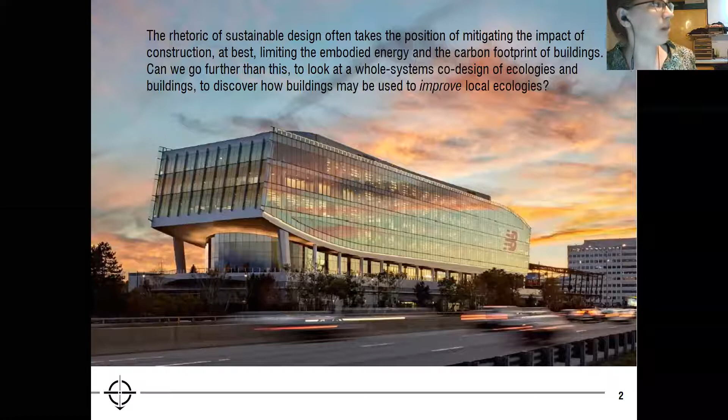Here's another LEED rated building from the Boston area. I found it interesting that the World Green Building Council identifies green buildings as buildings that in design, construction, or operation reduce or eliminate negative impacts, and can create positive impacts on our climate and natural environment. I'd like to propose that we're actually a very far distance from the latter, creating a positive impact for our climate and natural environment.

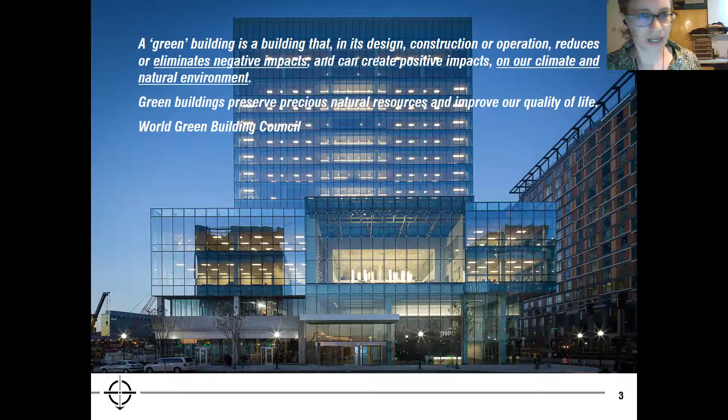But I'm going to show mostly two projects today that are hopefully moving in that direction.

For green materials and green buildings, the building materials I listed before—aluminum, steel, glass, country fired brick, even reinforced concrete—we can see the second column here is embodied energy, and the third column is carbon emissions of the building materials. For all of these LEED buildings, we have extremely high values of embodied energy and carbon emissions.

At the very bottom, we have CSEB, compressed stabilized earth block, with only 5% cement stabilization. That's one of the building materials I'm working with a lot, specialized at the Auroville Earth Institute. So we have a huge, huge difference in how much embodied energy is in these buildings.

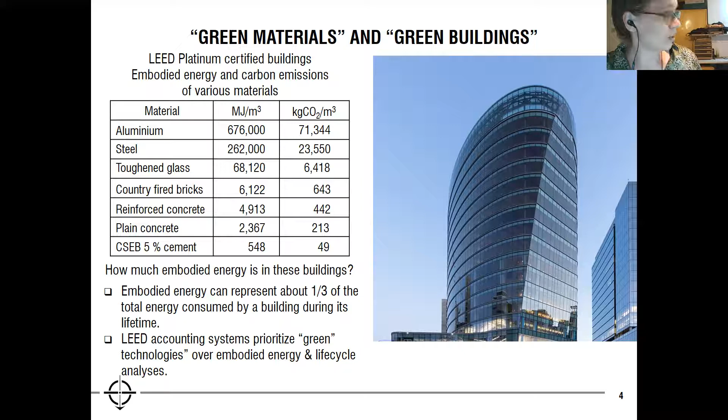LEED accounting systems basically prioritize green technologies, which are often themselves very high emissions and embodied energy technologies, over initial embodied energy and over life cycle analysis of buildings.

But at the Earth Institute, we're dealing with earth—one of the lowest carbon emitting, in fact a zero carbon emitting building material in theory, with very low embodied energy. We can start with the initial values being extremely low.

This is a collection of soils that we have here at the Earth Institute, and I'd like to tell you a little bit about soil before I show you some projects.

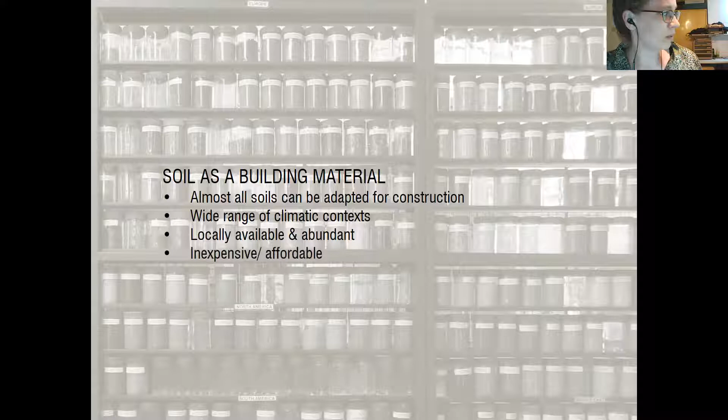Soil as a building material—basically all soils, or almost all soils, can be adapted for construction purposes. We have a very wide range of climatic contexts we can work in. Soil is always locally available and abundant. It's inexpensive, zero energy for production, has a very low carbon footprint, is 100% recyclable with a circular ecology of use, and reduces the use of imported materials.

Also, from the social side, we can say it involves labor-intensive construction methods, which is an important argument for us, that it invests heavily in local economies, local value chains, and human livelihoods, as opposed to just imported materials or technological methods.

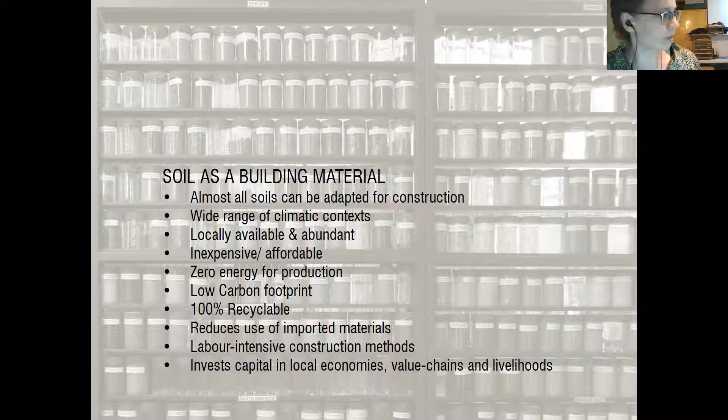This is an image of rammed earth. If we take 1 cubic meter of rammed earth, just to give you an idea of the complexity of the material, it will have more than 600,000 trillion individual grains in that material.

So it's a granular matter, very complex. We call it soft matter because it behaves both as a solid and also flows like a liquid.

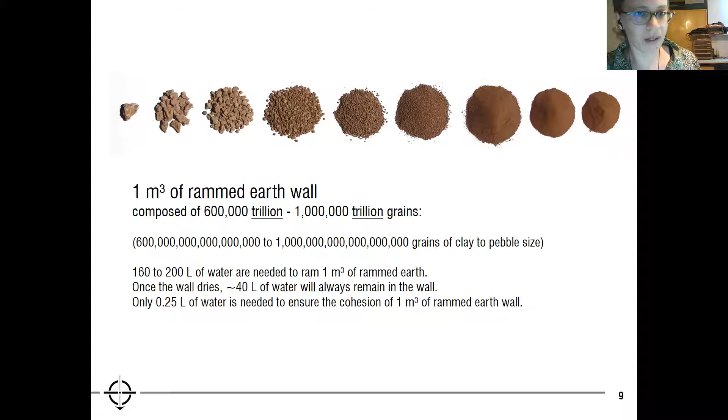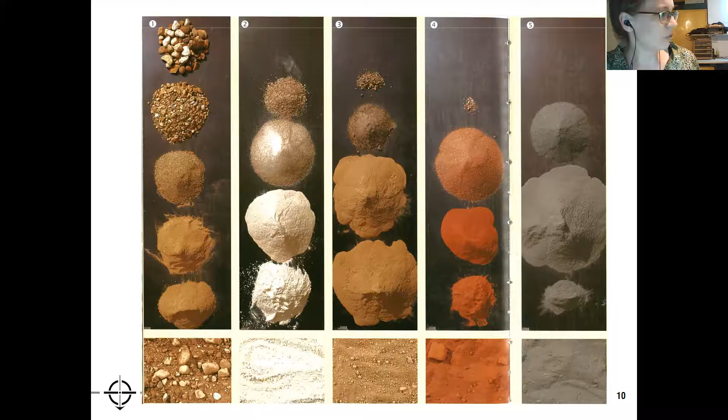Soil varies infinitely in grain size, texture, color, and behavior. We have such a wide range of different clays found in different earth samples, and therefore the behavior of each soil sample is extremely different.

I'm going to skip a little of the technical stuff here, but basically we have electrostatic force in clays. Clays are the living particle of the soil—they're what bind the soil together. Clays allow us to absorb and release water, therefore we can have swelling and shrinkage in clays and in earth, and that gives us breathing buildings.

This means we have to figure out how to stabilize the soil and make it stable in buildings, but it gives us benefit for human comfort because we can use it as a natural way of breathing in the building, and we'll talk about this in detail.

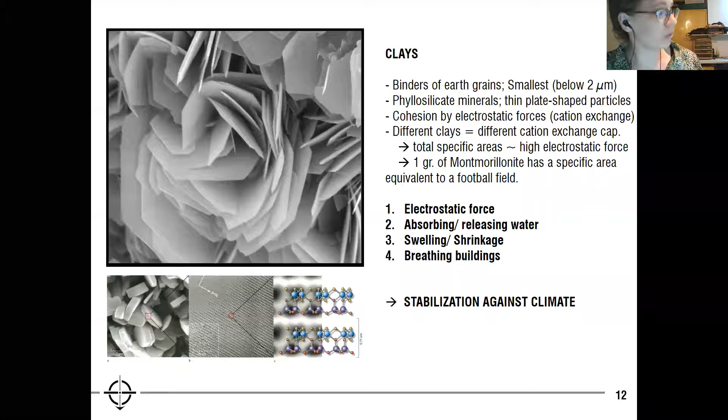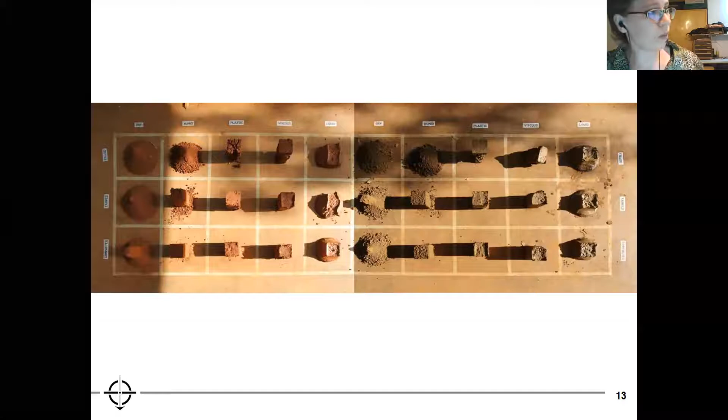As we add water to clay and to different types of earths, we have such a wide range of different behavior that it can be adapted to many different types of techniques. On the left is adobe, on the right is compressed stabilized earth block. So we can use earth in a raw state for construction, or we can stabilize it with cement, or by many other different types of processes. In this case, cement stabilization and mechanical compression is one great way to stabilize soil.

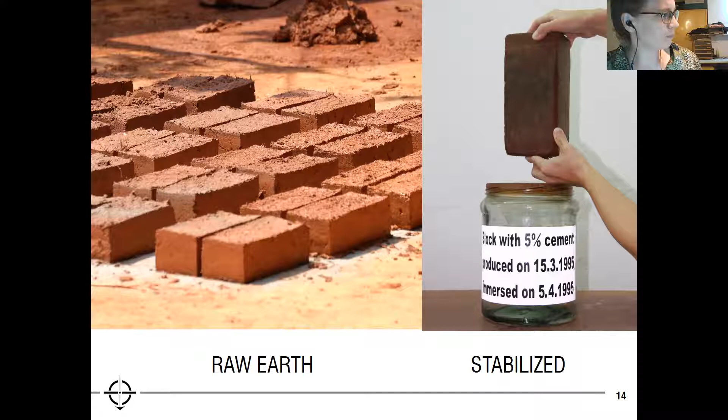This is compressed stabilized earth block that's produced here at the Earth Institute. And we have, depending on how you count, between 12 and 14 different earth techniques. These are a series of some of the different techniques as we vary the amount of water in the mix.

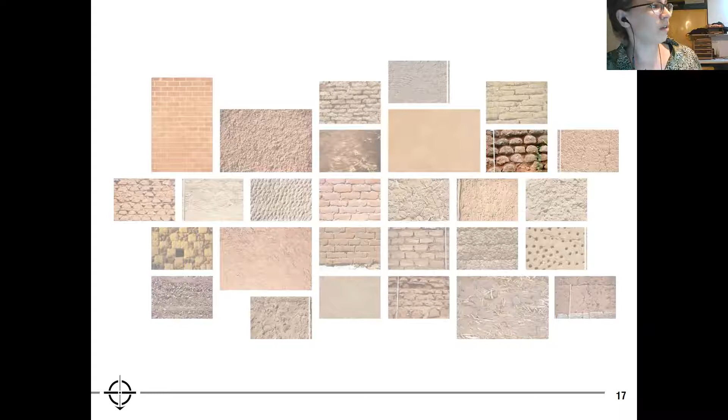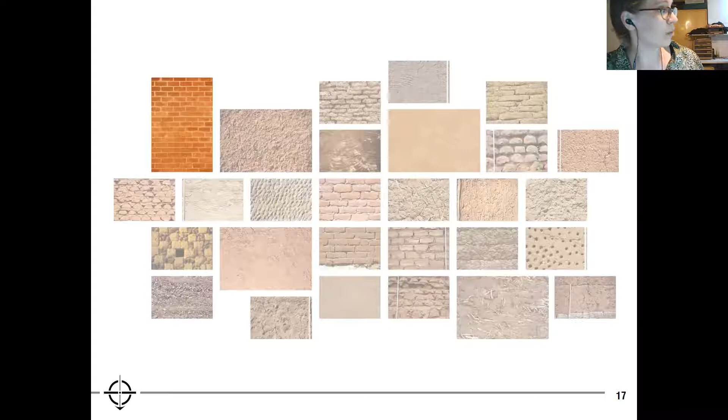I'll show some examples. This gives us an incredible variation of textures and language in a human landscape, in a built environment, from adobe to wattle and daub. This is laterite block, cob, plasters, rammed earth, and compressed earth block. So these are just a few of the different techniques: rammed earth, compressed earth block, poured earth, adobe, wattle and daub, and cob. I'm not going to go a whole lot into the different techniques, but it's important for you to understand that the techniques are so varied in their nature.

We have a wide range of different morphologies of building materials, thicknesses and thinness, so we can really take different earth techniques and adapt them to local climates, rather than just taking one imported building material. We can take the earth itself in a local place and adapt it to a technique that's best suited for that local place.

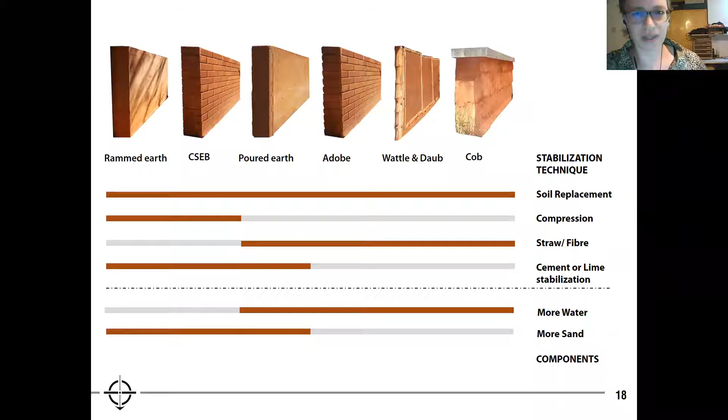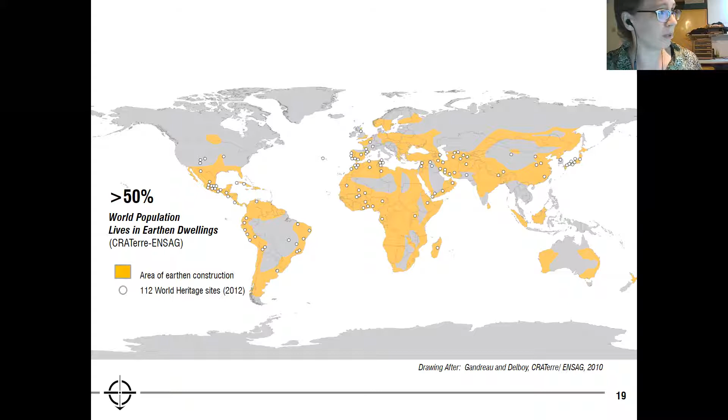That's mainly because in traditional societies, in vernacular culture, people have a highly attuned idea of what materials should go where. So what materials should be used for buildings, what should be used for infrastructure, what should be used for agriculture, and therefore the local place can be shaped very appropriately.

This also goes for cold climates. Now I'm going to show you an example in a cold climate, a rammed earth technique that's used in Tibet. Just around the corner from my building site is a monastery called Key Monastery, 11th century, and you can see how the local vernacular architecture has been shaped around this mound in order to optimize for the sun throughout the long, cold hours of winter.

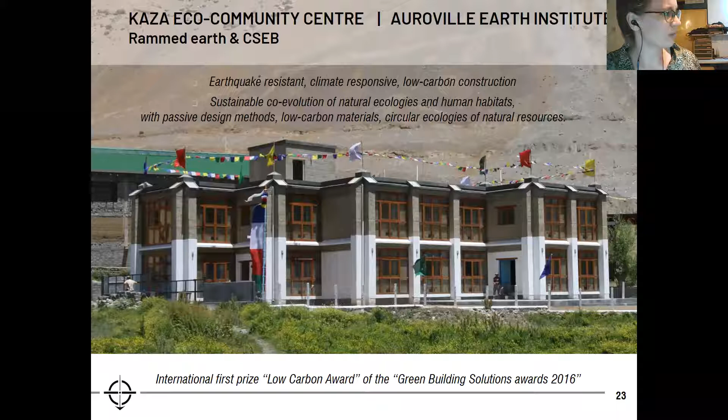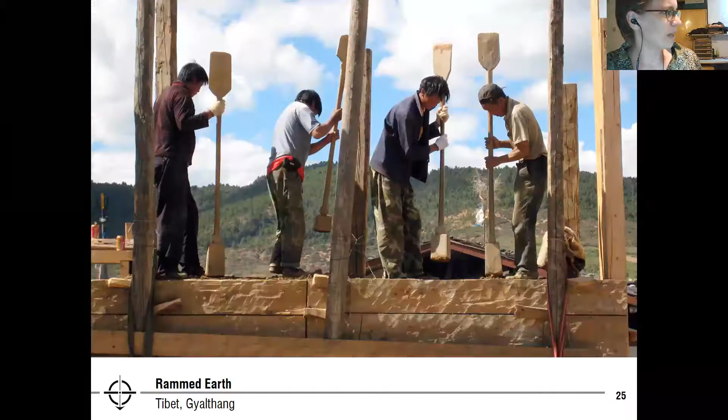So let's test this theory. This is an image of rammed earth from the site itself, based on an 800-year-old technique. It looks pretty simplistic in this image from Tibet, but it's actually very low strength ramming with this particular rammed earth. It's not at all like the high strength ramming often found in European rammed earth buildings.

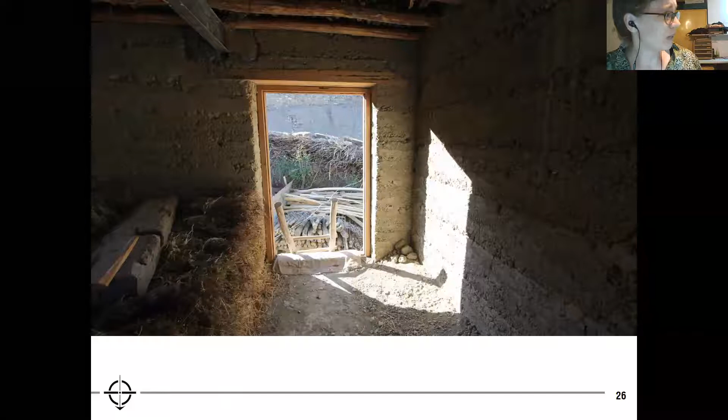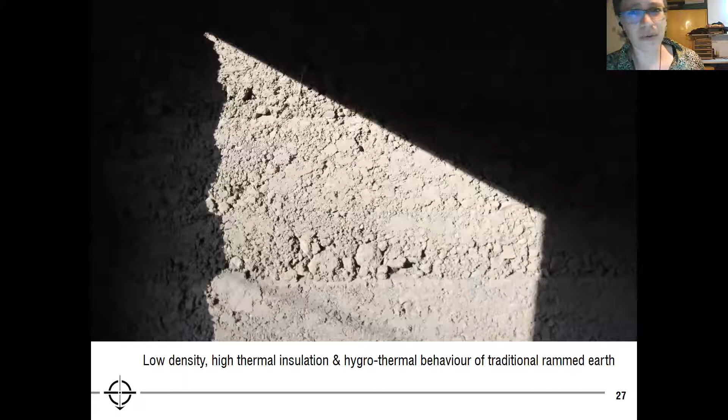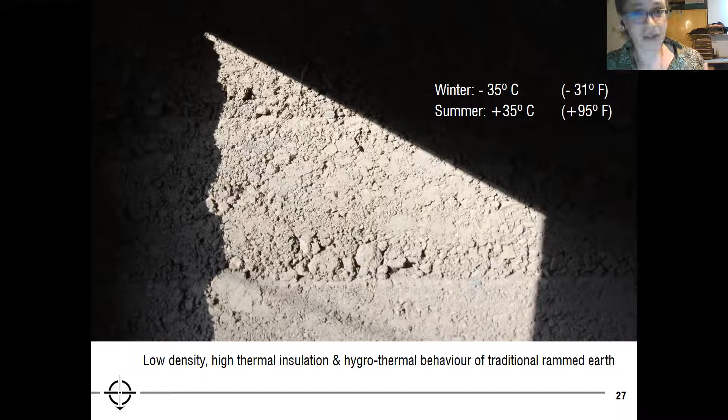You find this technique looks very rough in texture like this, with a lot of gaps of air and water found in the cross section of the wall. This isn't because it's a crude technique, but because there are winters of minus 35 degrees centigrade and summers of plus 35 degrees centigrade - for Americans, that's minus 31 to plus 95 Fahrenheit. That's a huge annual fluctuation in temperature, and the daily fluctuation is just as great, extremely cold at night, extremely hot in the daytime. So this low density, high thermal insulation building material has been shaped exactly by this climate.

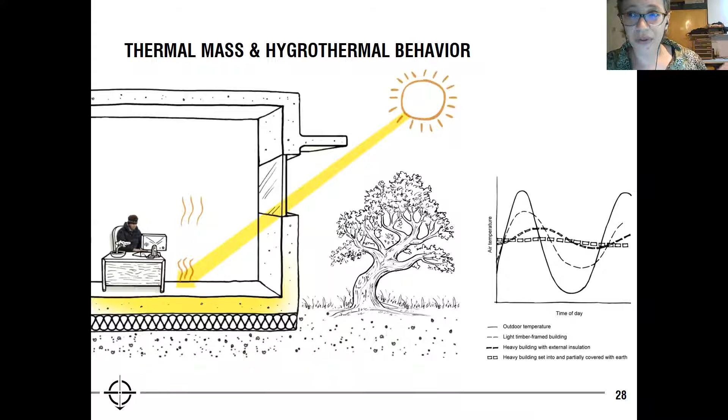We have thermal mass and hygrothermal behavior. Thermal mass is basically the time it takes for solar energy to be transferred through the cross section of a wall, which can passively warm a place in a cold night. So where we have temperate or cold climates like this, we can beneficially use the thickness of the wall to act like a battery for warming people in the evening.

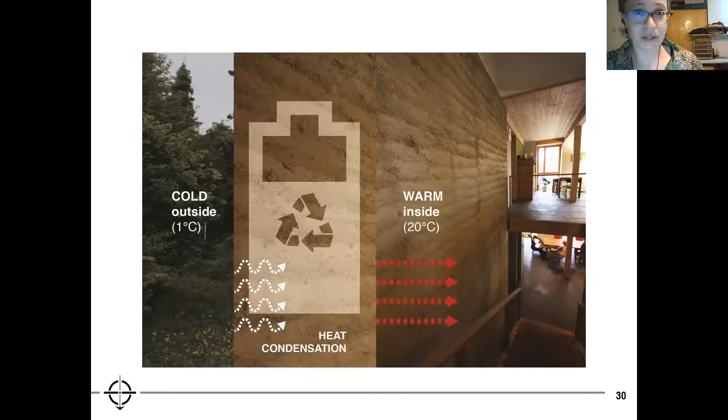There's also something called hygrothermal behavior because the clay is living. If it's cold outside and warm inside, we have condensation heat that's actually being generated by the clay particles themselves, by the earth - because it's a living material, we get this extra warming. The opposite is also true: if it's very warm or hot outside and cold inside the building, we have evaporative cooling, meaning the wall passively cools the inhabitants, creating a much more comfortable interior environment. Because the clay is a living particle of the earth, we can really benefit from it.

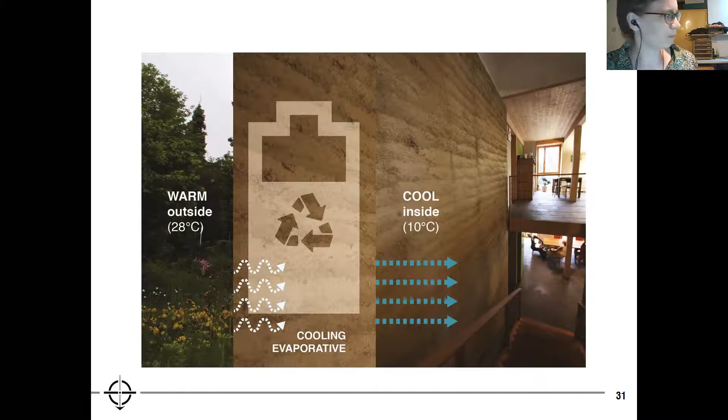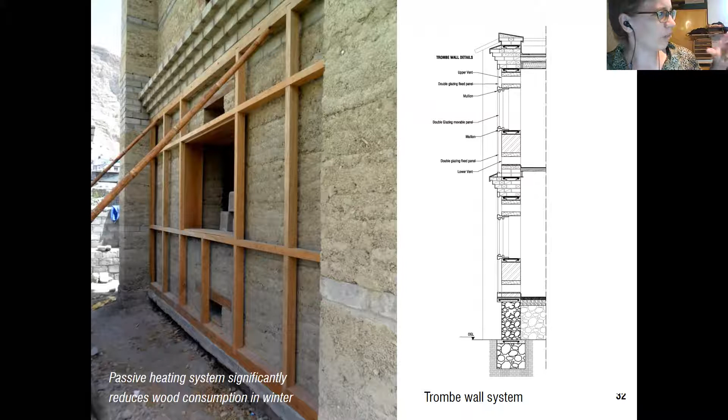In this building, we've also used Trombe wall systems, which is a double facade system using an upper and lower ventilator to create convection in the building itself. So here's a lower ventilator, here's an upper ventilator, and then we have the window opening that's basically operable.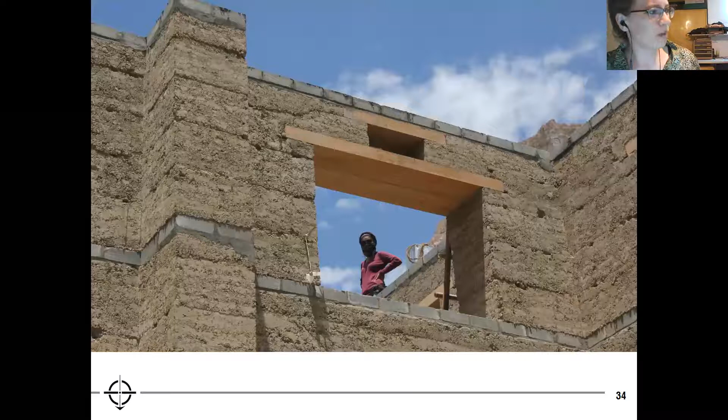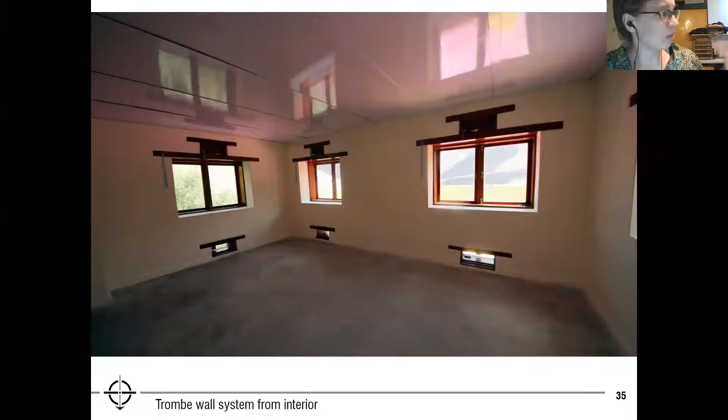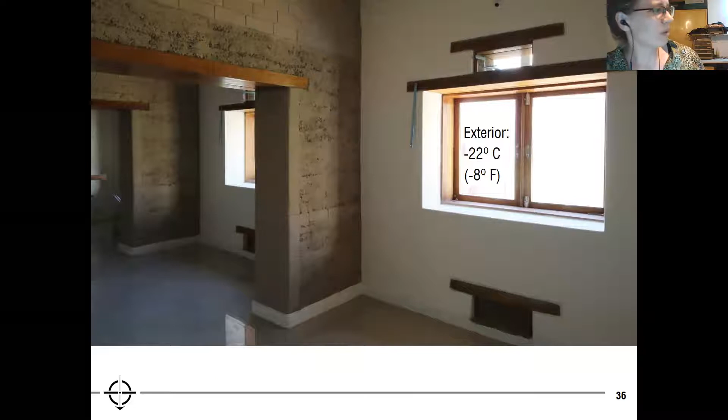In an environment that's extremely cold in the wintertime, like minus 31 Fahrenheit, we took some measurements. It was minus 8 degrees Fahrenheit outside, and we were able to measure that it was plus 50 degrees Fahrenheit inside the building. This was achieved in the wintertime with absolutely no other heating of the building.

There's not even a potbelly stove in this place. It's completely passively heated, which means we don't have to deforest any of the neighboring areas. This place is above the tree line itself.

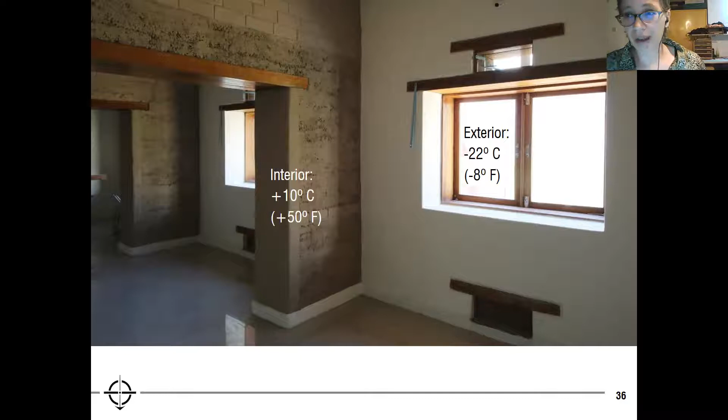So with simple technologies like this that are adapted to place, we can design very sensitively for the climate and for the inhabitants. They don't have to waste important money on shipping timber, a 12-hour drive in from the outlying areas.

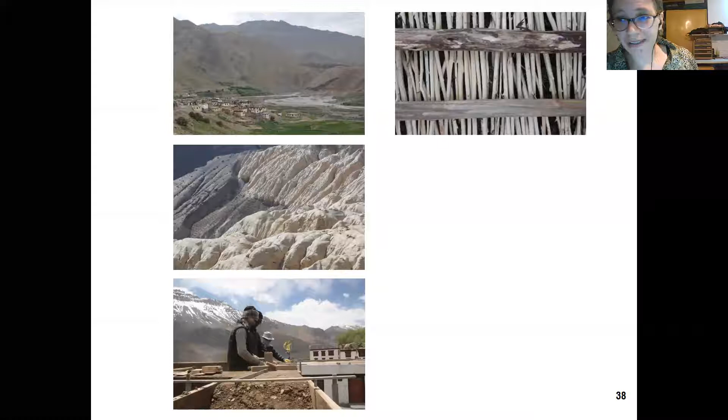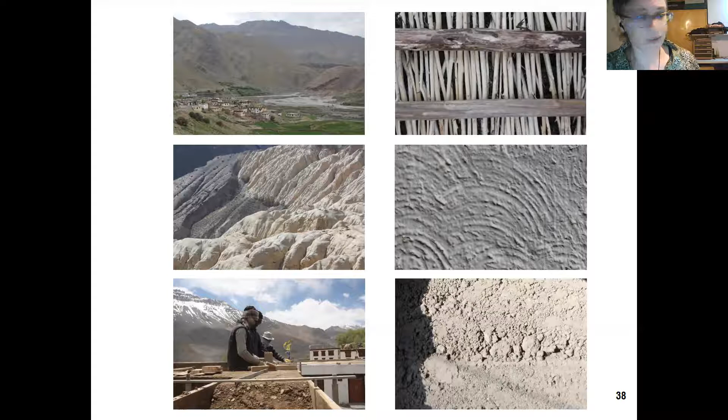So a few final images of the building with the Trombe wall system from the outside. This is the local area of Spiti Valley, in this very remote valley. Wood is being recycled from one generation to the next because there is no timber in this area. We have plaster clay extracted from deposits along the riverbed, and earth recycled from every other generation in the family. So it's a total circular ecology of building materials.

And then we get a kind of aesthetic of a hybrid of local materials, traditional knowledge, and a few very simple new technologies. On the north side of the building.

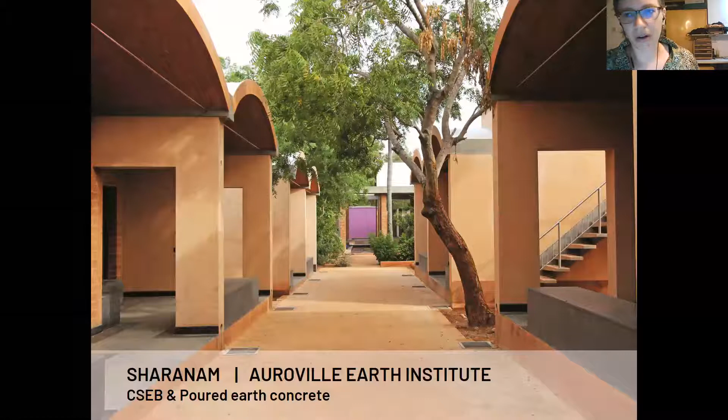So the question is, have I gotten yet to how does a building improve local ecologies? Not yet. Maybe this project gets to a sort of co-design between local ecology and building, but it's not actually trying to improve the local ecology quite yet. But this is a direction I think all architects need to begin to ask themselves in the coming decades. And I think maybe this next project I'm going to show you, which is Sharanam Rural Development Center, might get at this just a little bit better.

So this project was built - now we go from cold climate in the Indian Himalayan belt to hot, humid monsoon climate. This is in Pondicherry, India, just about 20 minutes' drive from where I am in Tamil Nadu right now. And the site was something like this.

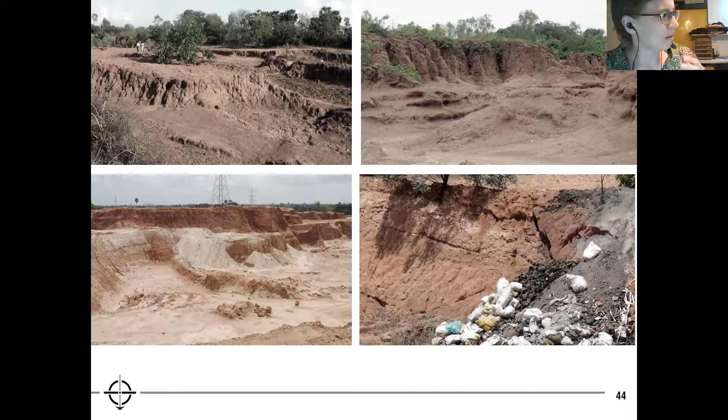It was a large excavation, a soil excavation that had been used for roads, very badly planned. What normally happens when we have unplanned soil excavations in monsoon climates is every monsoon we get heavy rains, sometimes up to 1.5 meters, and they erode all of the arable soil, all of the topsoil washes down to the sea, and then we lose this important water.

So it's so hot and so dry here in the summer times, but the survival of the local ecology really requires that for those 3 or 4 weeks of the monsoon season, we capture as much water as possible and extend that through the rest of the year.

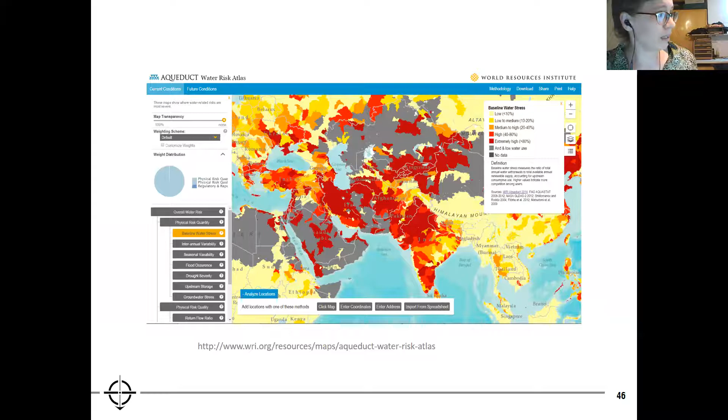This is coupled with the fact that India itself, and particularly Tamil Nadu down on the lower right, have some of the highest water stress or water scarcity levels recorded on earth right now.

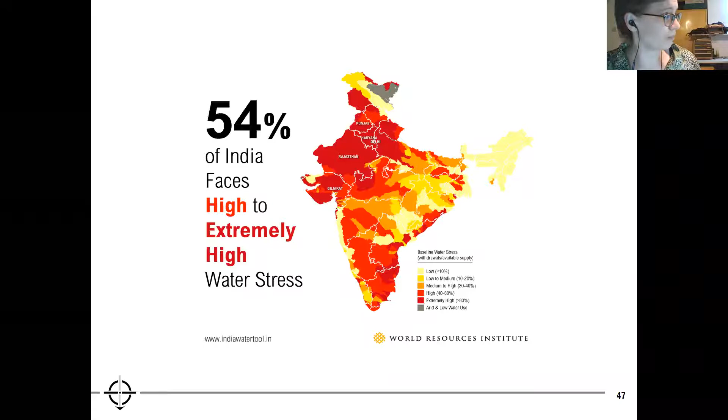There in this area, as you see Pondicherry just about in the middle here on the right side, there is a system of traditional tanks called eries, which are Chola era water management systems found in this area, but most of them have been silted up and neglected for a long period of time. Traditionally, these tanks were dug to capture as much water as possible.

I'm not sure if you can see here, this is a place called Ousteri Lake, right where the site is. Ousteri Lake is the significant watershed for the entire settlement of Pondicherry. So this area, where we have this huge, massive excavation, is the most important area for water scarcity, or basically climate resilience, of the entire region.

This project, called Sharanam Rural Development Center, is a low carbon campus that we like to say is contributing to regional land management and climate resilience. About 76% of the building materials used for this construction were extracted from the site itself. I'm going to show you some images of the conference hall building.

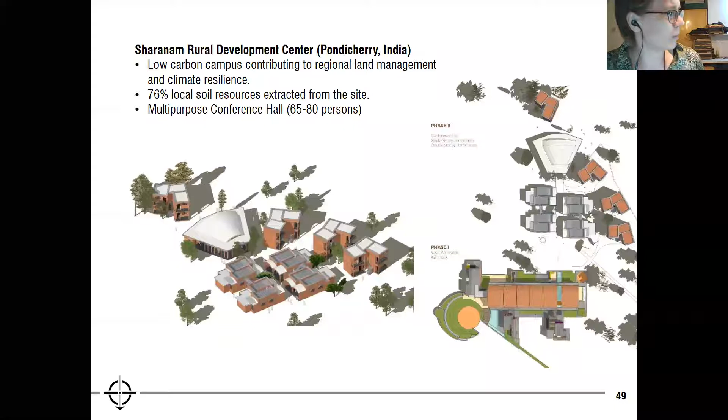So the entire site, which was already a very poorly managed quarry, we had the opportunity to resculpt the entire landscape, and in this case extract a huge amount of soil and earth used for construction purposes, and just displace this by about 100 meters on the site in order to create large tanks for water repercolation that help recharge the local water aquifers. This is so critical, both to maintain water over a long period of time and to recharge the aquifers as much as possible.

Just to get an idea of the scale of some of these recharge areas — but all of this soil could then be used for construction. And in this case, you see an exploded axon of the conference hall.

I can skip to it, but just to mention, the walls and roof system of this are mass systems. So we have thick walls of earth concrete and a large vault of compressed earth block that uses as much earth as possible in the construction.

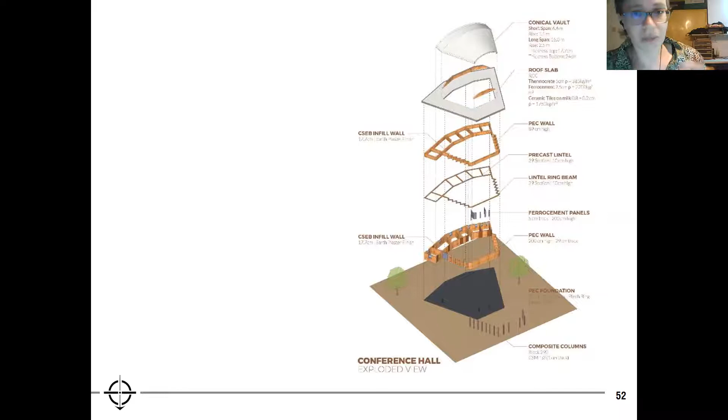So for that span, this is around the thickness of an eggshell, just a little bit more than that.

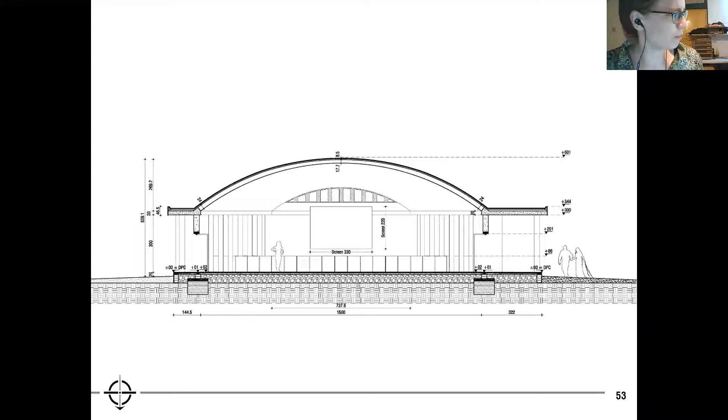As I mentioned, we have load-bearing walls and also foundations with something called poured earth concrete. So it's a superstructure — a very low carbon material, very low strength concrete that's using 50% earth. It's basically cast similarly to conventional concrete, which means people can easily adapt well-known methods to work with a very unconventional building material. So we don't have to teach people who already know concrete a significant amount, as long as the engineering for the material has been done well.

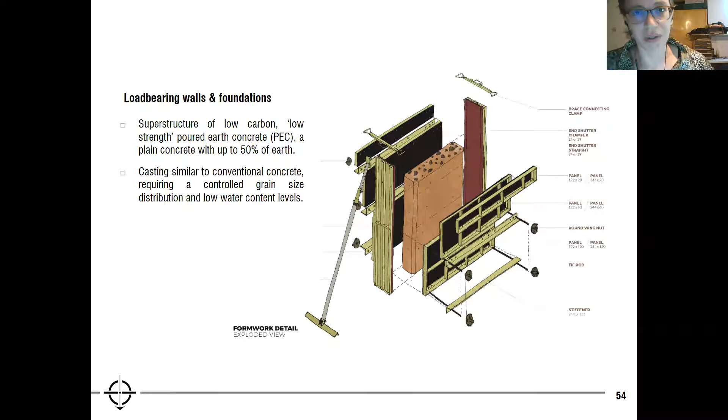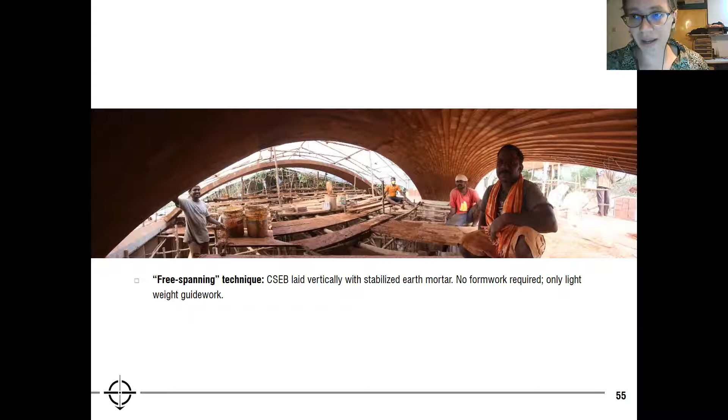This is a view of the vault itself. It's built with a free-spanning vaulting technique developed by the Earth Institute. So we have compressed earth block that's been laid vertically with stabilized mortar. There's no formwork at all required for this construction technique — just a series of string lines or masons' lines to guide the masons laying block in situ.

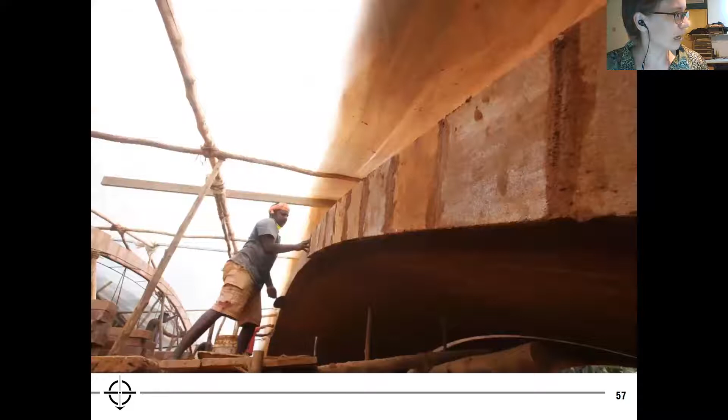A few images of the construction of the vault. So we have a large roof system. In this case, we don't have to have a slab construction. We can have many different types of roofing systems, and we can use, quote, weak materials like earth for roof systems if we use it in compression, like in an arch or a vault.

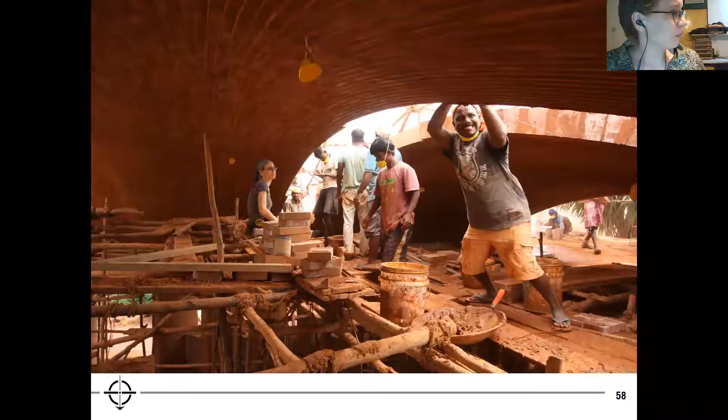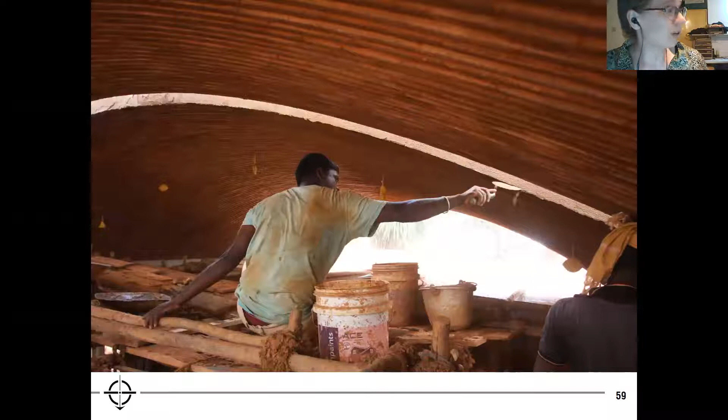This vault system is about 65 tons worth of mass material, so it's a very heavy roof using a lot of earth. And of course, a lot of studies had to be done for the stability of this vault as well, which is rather another lecture.

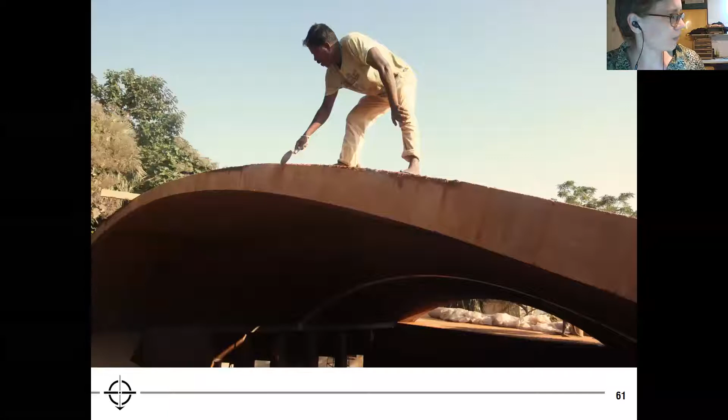Just to get a view now — this is the raw structure of the roof itself and its thickness. It's very, very thin, getting down to a minimal thickness at the crown, and a little wider at the base, 24 cm at the base. That gives you an idea of the raw construction.

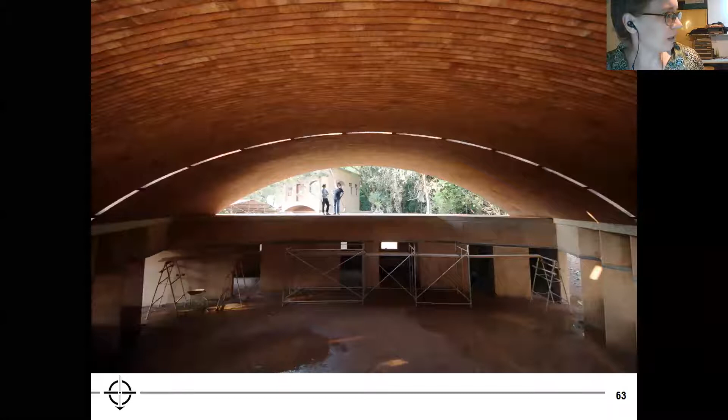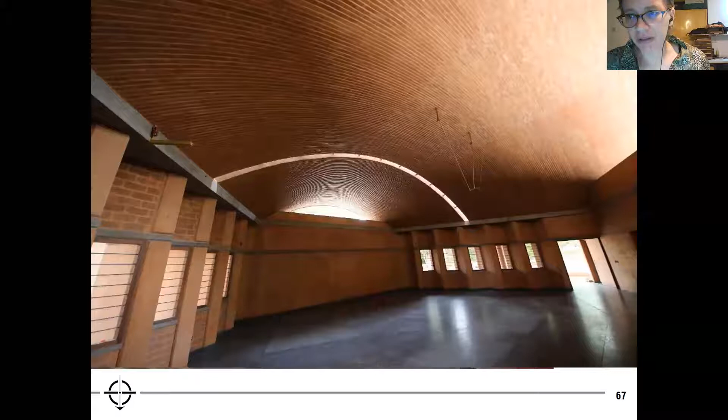So, I start with the question: can buildings improve local ecologies? And what does that mean for the aesthetic of architecture? What does that mean for the aesthetic of construction? What does that mean for the socioeconomics of construction, when essentially two-thirds of the cost of construction is going into man hours? It can be as much as three-quarters of the cost of construction contributing to local livelihoods, as opposed to buying solar panels, UV treated glass, aluminum fenestration, and all the fancy gadgets for a LEED rated building.

So there are aesthetic questions, socioeconomic questions, a whole series of questions that I think are important to ask in this day and age about what the impact is on the local ecology itself, and how our culture of construction, including our livelihoods in construction, impacts ecology.

So now we have this completed campus, and the entire quarry, which was an abandoned quarry, really a desolate landscape, has been totally resculpted. We have a few beautiful buildings, but really the buildings have moved all of this mass and soil from one place to another in order to channel water in a way that sustains the whole ecology of the city of Pondicherry. And in water scarce places like India, we're actually urgently needing to ask these questions right now.